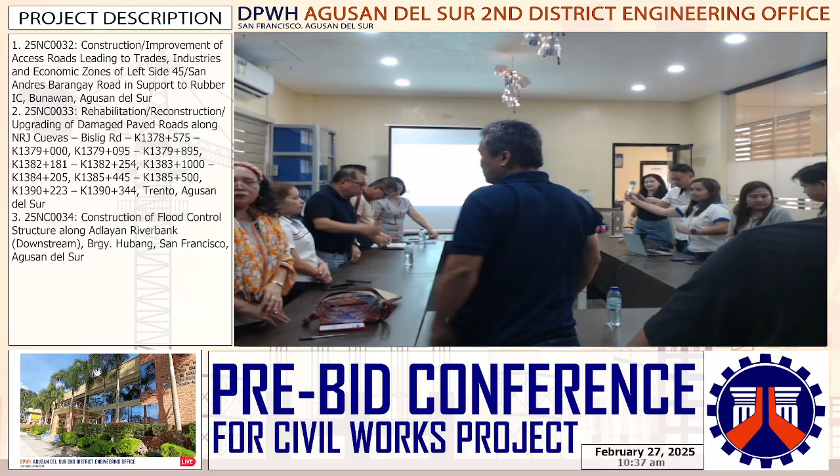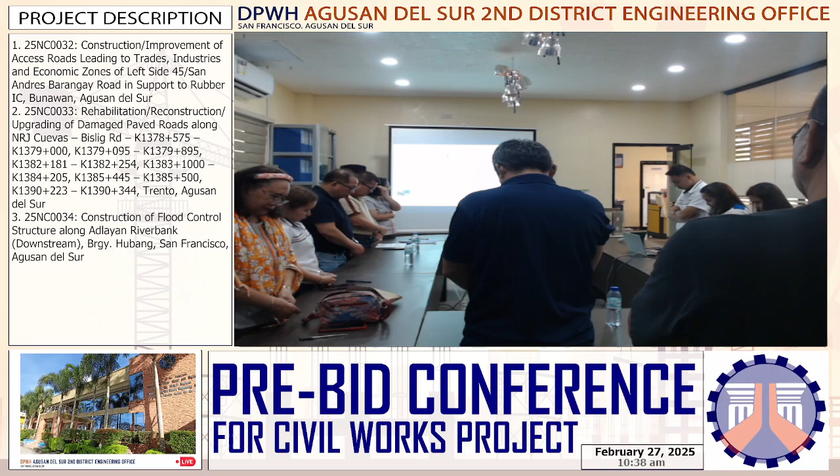Let us find ourselves in the presence of the Holy God, the Father, the Son, and the Spirit. Amen. Almighty God, we gather in your presence, seeking your guidance and wisdom as we embark on these new projects in 2025. We come to you with humble hearts, seeking your guidance and wisdom. Grant us clarity of vision and purpose, that we may align our goals with your divine plan. May our preparation and planning be infused with your spirit of excellence and integrity. Give us discernment and wisdom in our decision making, that we may choose the best path forward. Bless our teams in collaboration with unity, effective communication, and a shared commitment to excellence. As we navigate the complexities of the pre-bid conference, we ask for your protection and favor. May our endeavors be fruitful and successful, bringing benefit not only to our organization, but also to the communities we serve. We trust in your goodness and provision. This we ask in the mighty name of our holy God. Amen.

Okay, for attendance, Secretariat Protocol. Once again, good morning to each and everyone. Before we go to our pre-bid conference, I call the attendees of this activity's pre-bid conference.

For the BAC members, we have our Regional BAC Chairperson, Engineer Wilfred R. Bisaya. Our Regional BAC Vice Chairperson, Engineer Yodigario M. Maso. Regional BAC regular member, Engineer Manuel Sinario. Regional BAC regular member, Edwin Tina Corda, Ma'am Jovelinda Elanto, Engineer Elmelin Sipulancos, Engineer Rodel A. Ridao. For the Regional BAC Secretariat, yours truly, Engineer Delma Espresso, Engineer Alec Madeline C. Abogado.

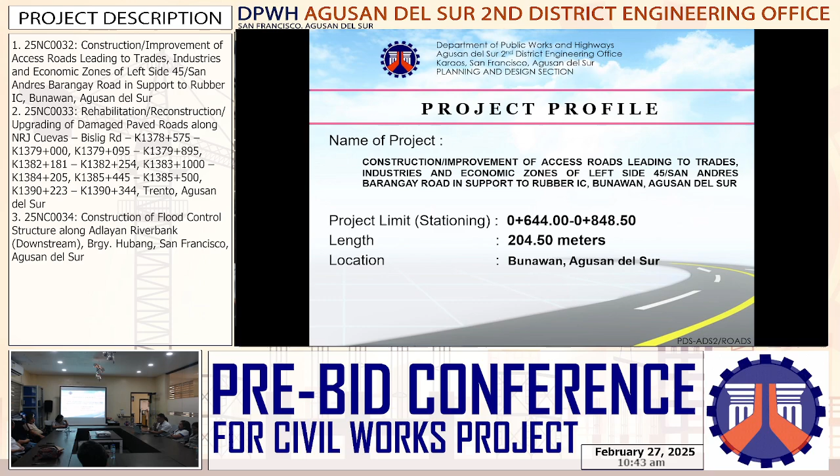The first project is the construction, improvement of access roads leading to trades, industries, and economic zones of Left Side 45, San Andres Barangay Road, in support to Rubber IC, Bunawan, Agusan del Sur, with a project limit of 0 plus 644 to 0 plus 848.5, with a total length of 204.5 meters. Location of project: Bunawan, Agusan del Sur. So it has an appropriation of 10 million pesos, ABC of 9.8 million, with a total calendar days of 94. Classification: roads. Source of fund: NEP, FY 2025.

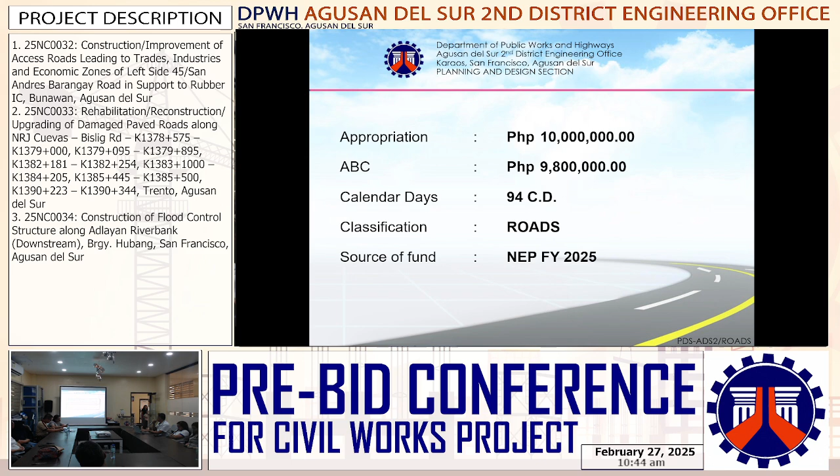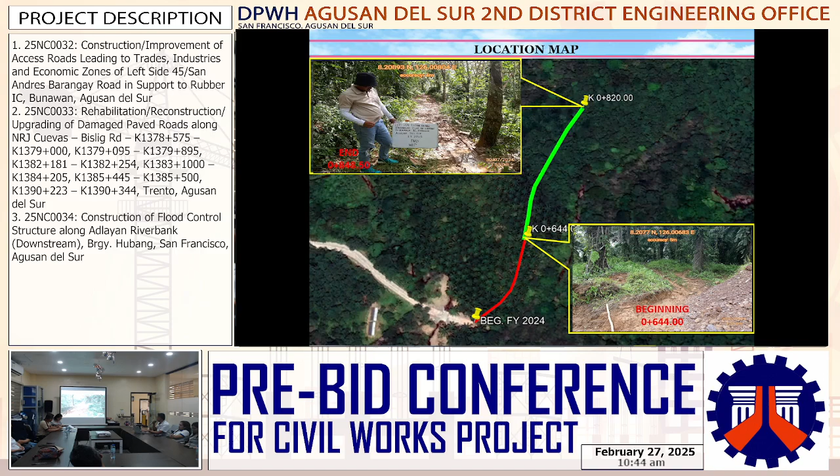So this is the listing of the NEP FY 2025. This is the location of the project, and the site photos. This is the plan and profile.

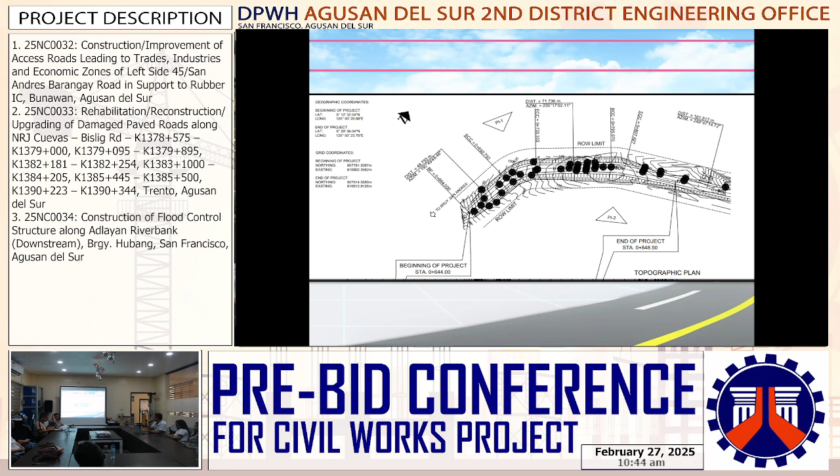For the typical section, we have a total width of the carriageway equivalent to 6.7 meters with 2 meter shoulders and a grouted riprap canal at both sides. So the thickness for our PCCP is 280 millimeters thick, and for the shouldering it is 150 millimeters thick. These are the cross sections.

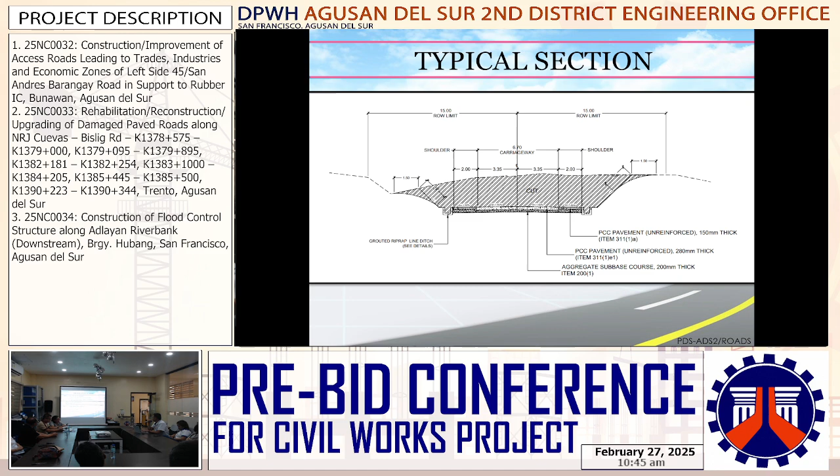For the program of works, for facilities for the engineer, we have provision of field office for the engineer on a rental basis, 2.5 months. Provision of furnitures, fixtures, equipment, and appliances for the field office, 1 lump sum. Under this item is the laptop computer for administrative use, 1 unit for the maintenance section.

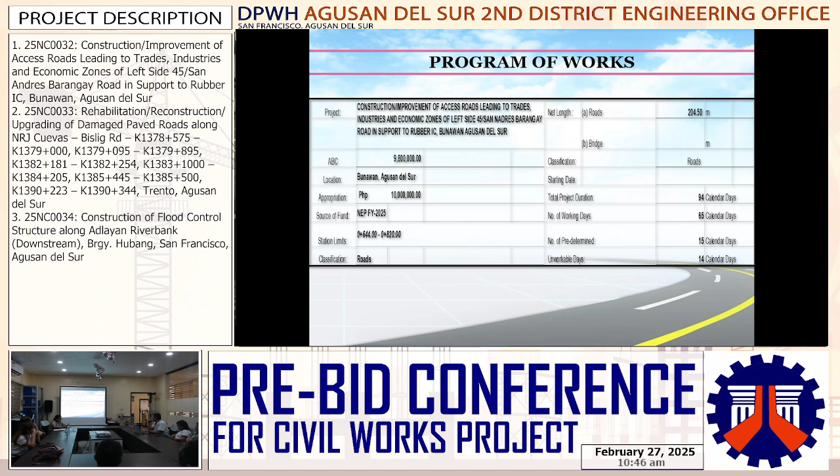For other general requirements, we have construction survey and staking, 0.18 kilometers. Miscellaneous survey and staking, 1 lump sum. Project billboard, signboard, 4 each. Occupational safety and health program, 1 lump sum. Traffic management and mobilization, demobilization, 1 lump sum each.

For the clearing and grubbing, 0.47 hectares. Surplus common excavation, 16,825.49 cubic meters. Embankment from roadway / structure excavation, 35.44 cubic meters. Subgrade preparation, 2,299.19 square meters.

For sub-base and base course, aggregate sub-base course, 409 cubic meters. For the surface course, we have Portland cement concrete pavement unreinforced, 0.15 meters thick, 409 square meters. Portland cement concrete pavement unreinforced, 0.28 meters thick, 1,483.88 square meters. For drainage and slope protection structures, grouted riprap class A, 86.91 cubic meters.

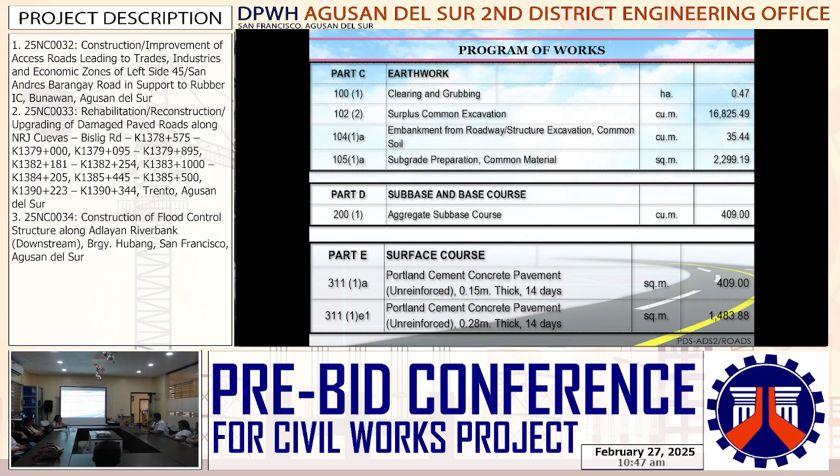Miscellaneous structures: hazard markers, 450 by 600 millimeters, Chevron signs, 6 each. Reflectorized thermoplastic pavement markings, white 51.25 square meters, and for the yellow 4.5 square meters.

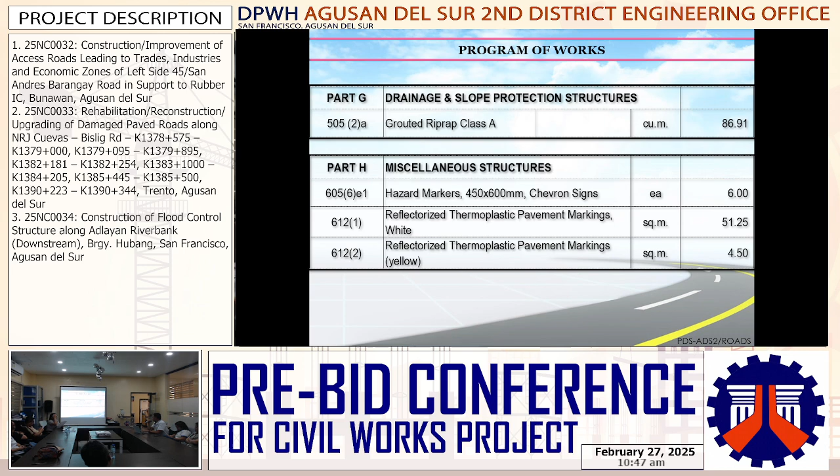For the quarry sources: for our item 200, will be taken at Salvacion, Bahayan River, Cuevas, Trento, Agusan del Sur with a hauling distance of 31 kilometers. For the sand, will be at Agusan River, Patrocenio, Sta. Josefa, Agusan del Sur with a hauling distance of 33 kilometers. For our gravel and boulders, will be at San Ignacio, Santa Maria, Trento, Agusan del Sur with a hauling distance of 37 kilometers.

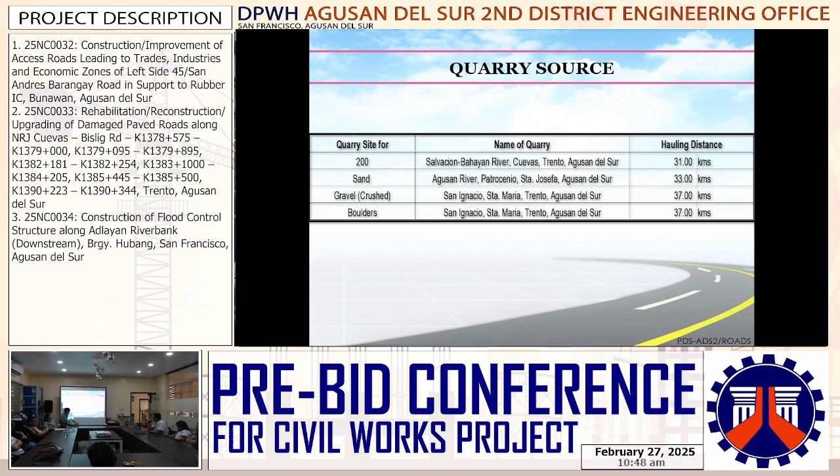For the minimum equipment requirement, we have dump truck 2 units, concrete vibrator 2 units, transit mixer 2 units, vibratory roller 1, cargo truck 1, set applicator machine 1, bulldozer 1, water truck 1, concrete saw, concrete screeder, concrete mixer, payloader, road grader, backhoe, kneading machine, bar bender, bar cutter, total station, joint sealer machine, 1 unit each.

And that's all for this project.

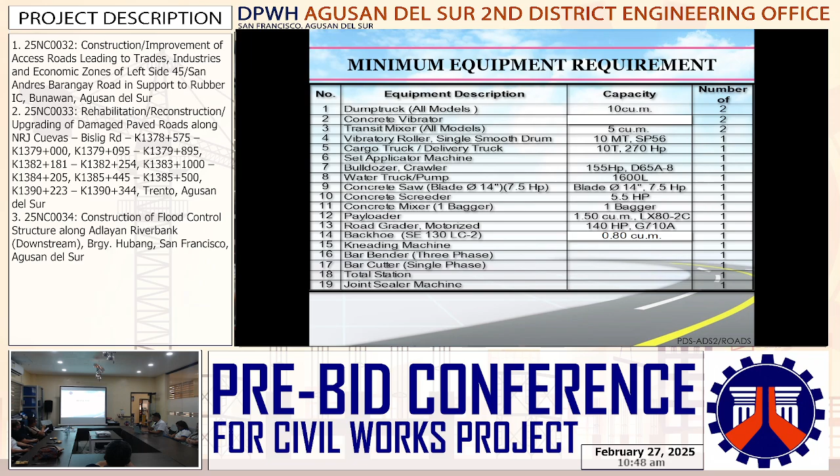Okay. Any question for the presentation? Comments? Say yes, sir.

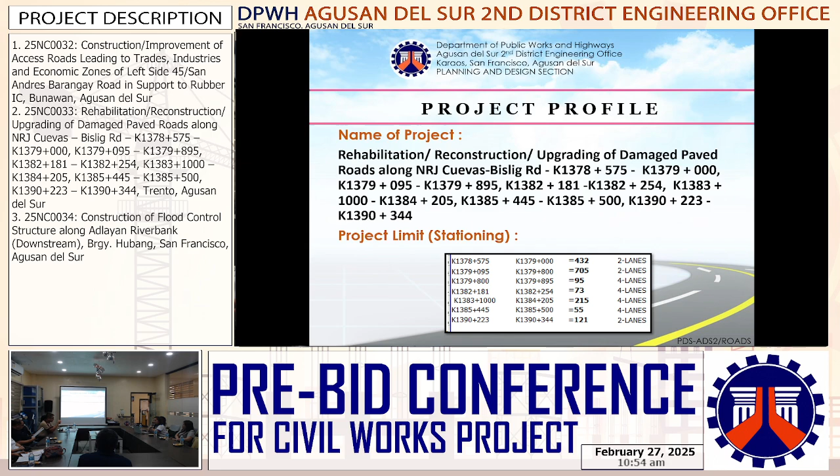By the way, the project is listed in GAA 2025 but under the DPWH initiative, so we are waiting for the release of the SAA.

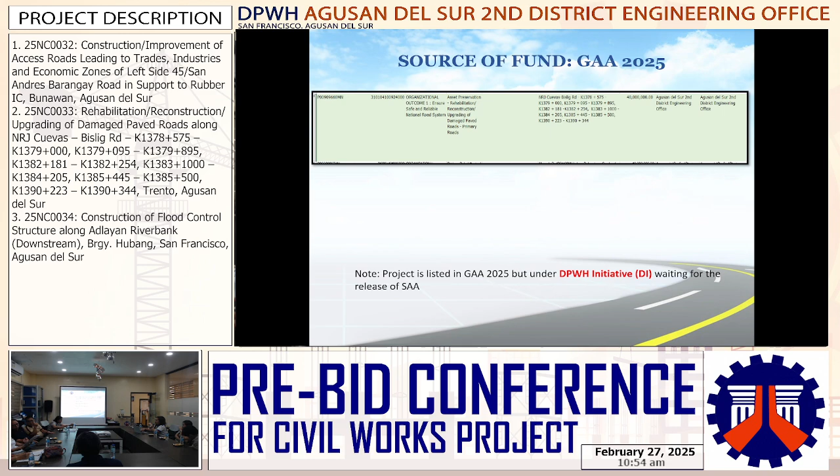Type 4, reconstruction of concrete pavement with a total or net length of 1.696 kilometers or 3.392 lane km, as per PAO and as reflected in GAA 2025 details. Located at Trento, Agusan del Sur, with an appropriation of 40 million, an ABC of 39.2 million, calendar days to complete 215, classification: reconstruction of concrete road, source of fund GAA 2025.

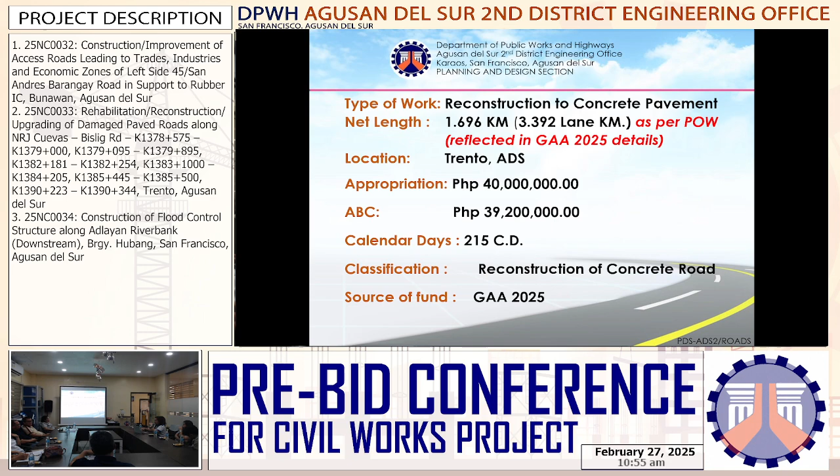For project description, this project involves reconstruction of concrete pavement at stations specified or flashed on the screen, with a target length of 1696 meters or 3.392 lane km.

Carriageway with inner lanes, lane 2 and lane 3, of 6.7 and 6.1 meters, thickness of 0.28 or 280mm and 230mm. Then we have provision of CTB with 0.2 meters or 200mm thickness in order to improve the subgrade of the road.

Removal of the existing PCCP bad section with a carriageway width of 6.1 and 6.7 meters respectively. So this is the photo of the before stage.

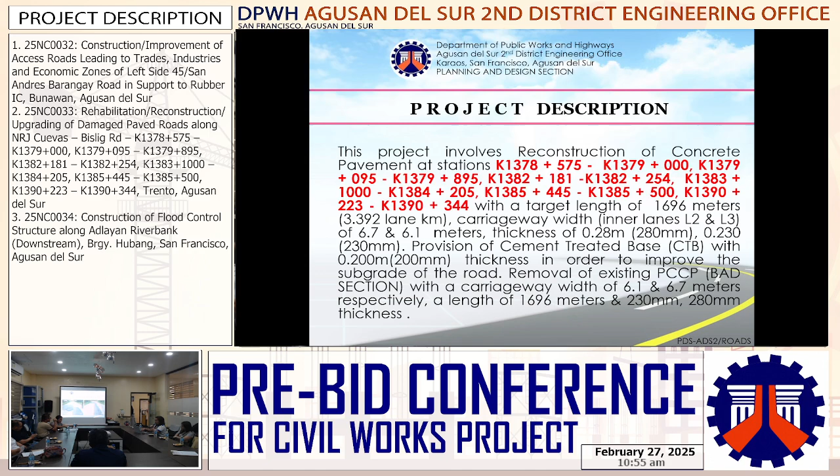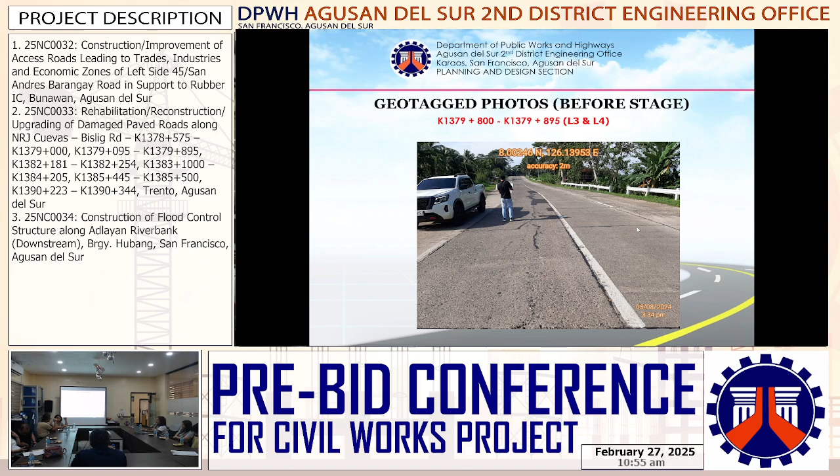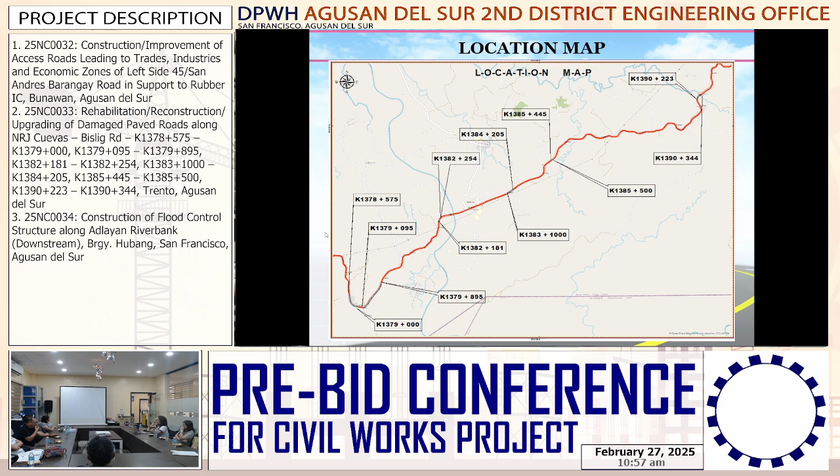For the program of works, we have Part A, facilities for the engineer. We have construction of field office for the engineer, 5x5 or 25 square meters, one lump sum. A.1.1.11, provision of furniture, fixtures, equipment, and appliances for the field office for the engineer.

We have the UPS for desktop computer, specialized software. We have one unit for planning, one lump sum.

Part B, we have other general requirements. B.4, construction survey and staking, 1.7 kilometers. B.4.10, miscellaneous survey and staking, one lump sum. B.5, project billboard or signboard, 4 each. B.7.2, occupational safety and health program, one lump sum. B.8.2, traffic management, one lump sum. B.9, mobilization, demobilization, one lump sum.

So we have Part C, for the earthwork, we have 1013(A6), removal of actual structures and obstructions, 0.3 thickness PCCP reinforced, near the approach slab at Bitaogan Bridge. We have 40 square meters.

We have also removal of actual structures, obstructions of 0.23m thickness and reinforced, 5,002 square meters. We have also removal of actual structure obstructions of 0.28 meters thick and reinforced, 5,835.7 square meters. So we have 1022, surplus common excavation, 2,313.72 cubic meters.

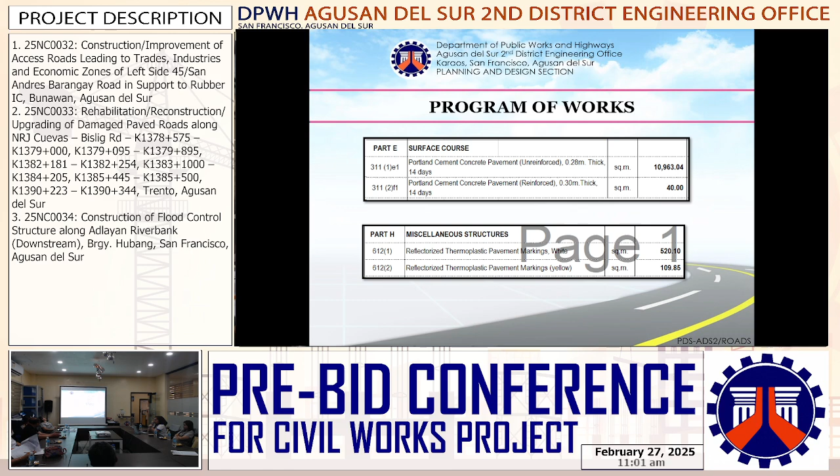For the minimum equipment requirements: dump truck 2, payloader, backhoe with breaker, road grader motorized, vibratory roller, water truck, total station, 1 each. Transit mixer 2, concrete vibrator 2, concrete screeder, concrete saw, bar cutter, bulldozer, cargo truck, set applicator machine, kneading machine, water pump, joint sealer machine, 1 each.

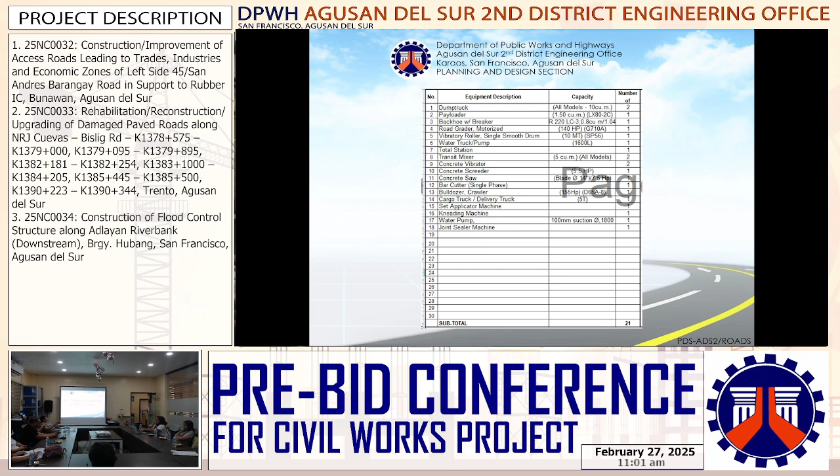For the quarry sources: item 201 will be taken at Salvacion Bahayan River, Trento, Agusan del Sur, with a hauling distance of 8 kilometers. Sand and gravel will be taken at San Ignacio Simolo River, Trento, Agusan del Sur, with a hauling distance of 7 kilometers. The sand must be screened and washed, and the gravel is crushed.

That's all for contract ID.

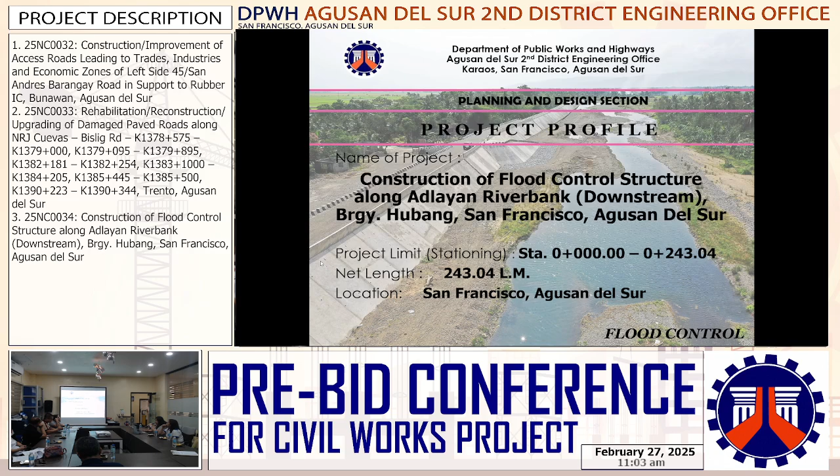Calendar days to complete is 210 days. Classification is under flood control, and the source of fund is under GAA FY 2025 under the category of CI, continuing implementation.

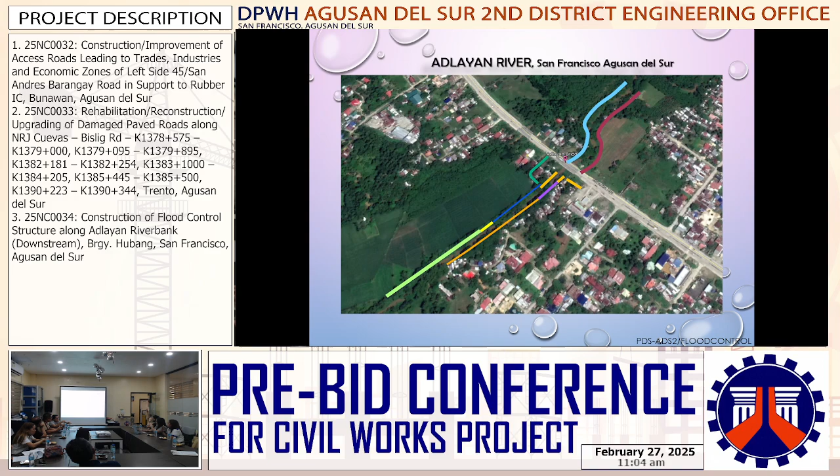This is the progress of the Adlayan Riverbank protection as of 2025, and this green part is the proposed project. This is the progress report that I've already presented before.

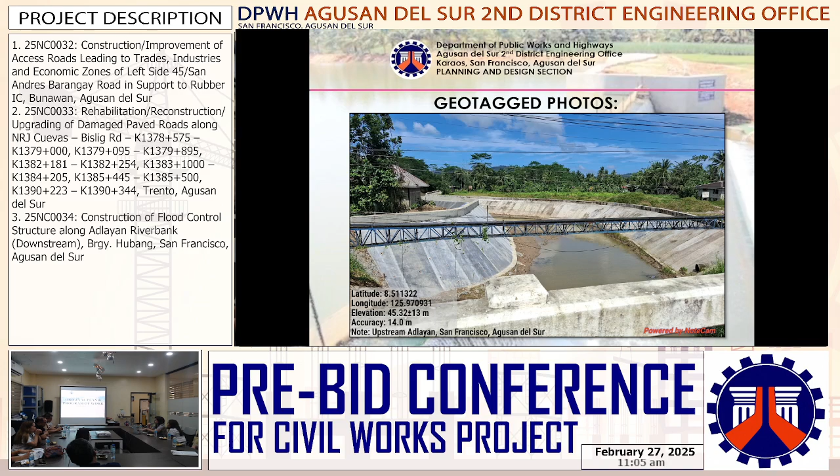And the photos there at the beginning and the end, and our topographic map.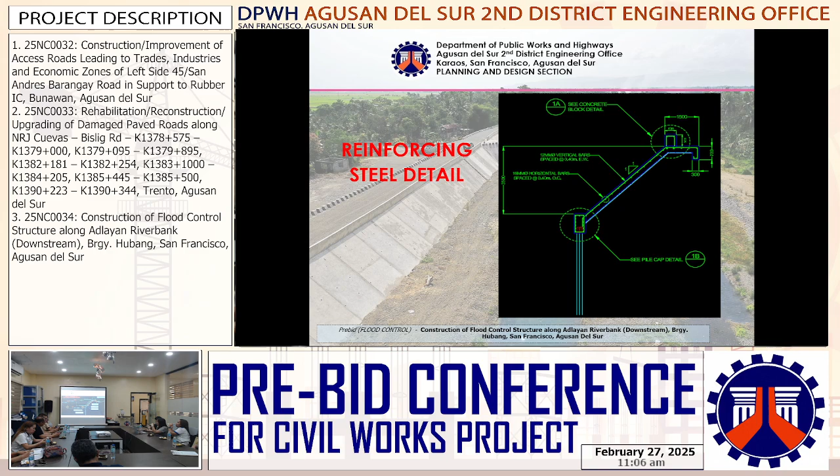For the typical reinforced concrete slope protection, we have concrete slope protection of 0.3 meter thick, and underneath is lean concrete of 50 mm thick. Our berm is 1.5 meter with concrete blocks of 0.5 by 0.6. Our structure slope has a sloping of 1:1 and vertical height of 3.5.

Pile cap is 0.5 by 1 meter depth with structural steel sheet pile of U-type, 9 meters in length. For the land side, we have grouted riprap slope protection of 0.3 m thick and aggregate sub-base course of 200 mm thick, 2 meter width.

For the reinforcing steel detail, we have 12 mm vertical bar spaced at 0.4 each way, and 16 mm horizontal bar spaced at 0.4 on center.

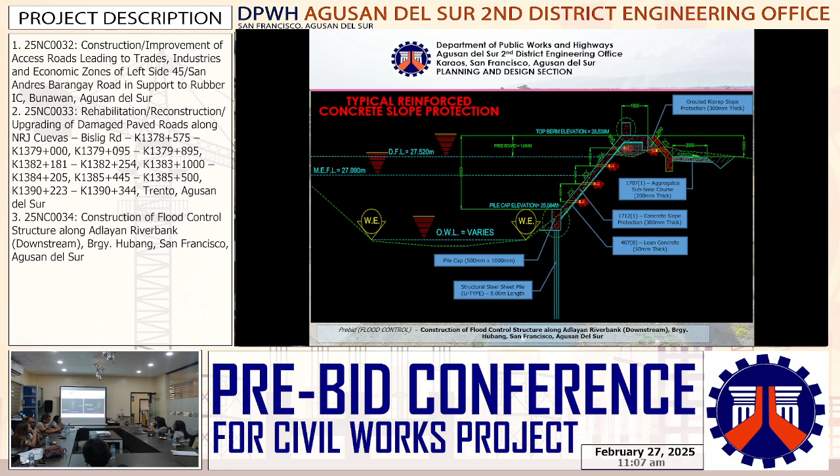For the concrete block, we have 12 mm stirrups spaced at 0.4, and two pieces of 12 mm reinforcing steel horizontal bars. For the pile cap, we have 12 mm stirrups spaced at 0.4 each way, and 13 pieces of 16 mm reinforcing steel horizontal bars.

Our steel sheet pile is 9 meters, type GSP type 2, with the specification indicated on the screen.

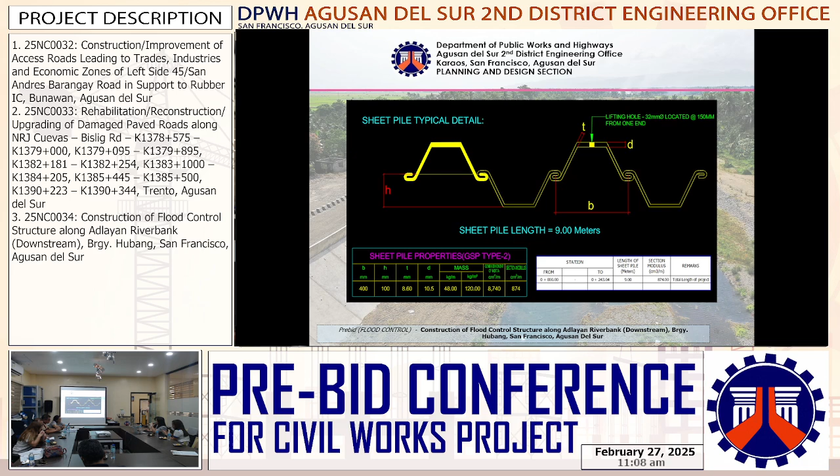With the programs of work, items involved are the following. For Part A, facilities for the engineer, we have A.1.13, construction of field office for the engineer, 1 lump sum. A.1.111, provision of furnitures, fixtures, equipment, and appliances for the field office for the engineer.

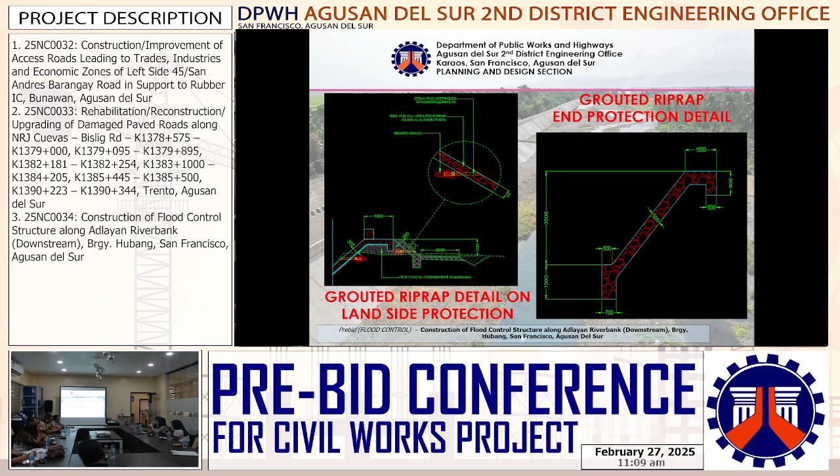For Part B, other general requirements, we have B.41, construction surveillance staking, 0.243 km, project billboard signboard for each, occupational safety and health program, 1 lump sum, traffic management, 1 lump sum, mobilization, demobilization, 1 lump sum.

For Part LA, earthworks, we have clearing and grubbing with 3,050.54 square meter quantity. Individual removal of trees, 19 each. Structure excavation, common soil, 1,641.84 cubic meters. Embankment from borrow, 978.97 cubic meters. Aggregate subbase course, 104.99 cubic meters.

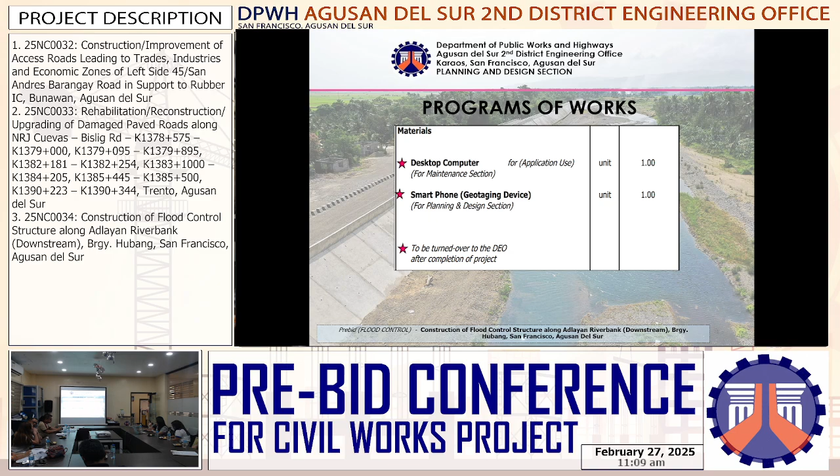For Part LB, bank and slope protection works, we have reinforcing steel, grade 40, for pile cap and concrete blocks only, with 8,413.42 kilograms. Structural concrete class A for pile cap and concrete blocks, 193.83 cubic meters. Lean concrete class B, 75.46 cubic meters. Grouted riprap class A, 227.10 cubic meters. Concrete slope protection, 502.10 cubic meters.

Structural steel sheet piles furnished, 5,463 meters. And structural steel sheet piles driven, 5,280.9 meters.

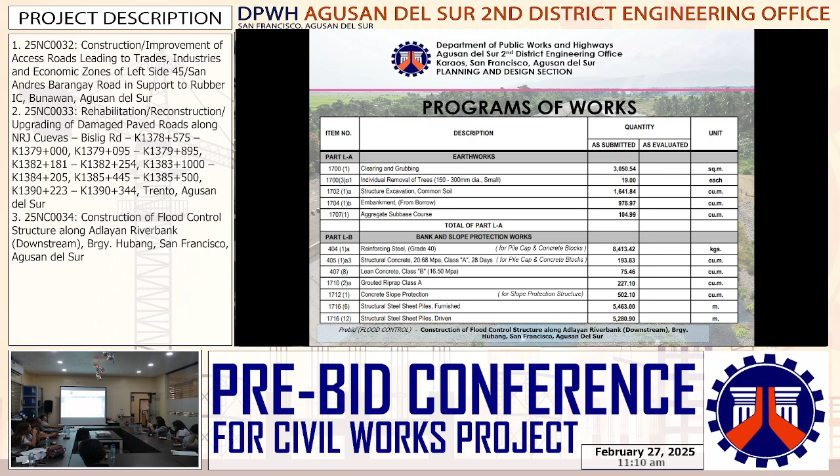For the minimum equipment required, we have bulldozer 1, backhoe 1, payloader 1, dump truck 2, motorized road grader 1, vibratory roller, water truck 1, bagger mixer, concrete vibrator, plate compactor, generator set, truck mounted crane, vibro hammer, transit mixer, welding machine, and cargo or service truck, 1 unit each.

For the quarry sites, embankment and aggregate subbase course will be taken from Lapinigan Creek, Barangay Ormaca, San Francisco, Agusan del Sur, with hauling distance from site of 14 kilometers. Sand will be from Agusan River, Barangay Patrocinio, Santa Josefa, Agusan del Sur, with 71 kilometer hauling distance. Gravel will be from Simula River, San Ignacio, Santa Maria, Trento, Agusan del Sur, with 76 kilometer distance. And the boulders will be taken from Maog River, Barangay New Maog, Prosperidad, with 20 kilometer hauling distance.

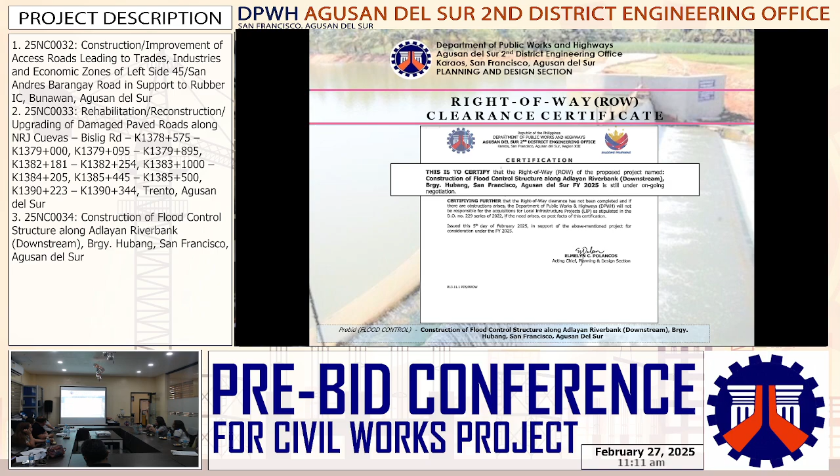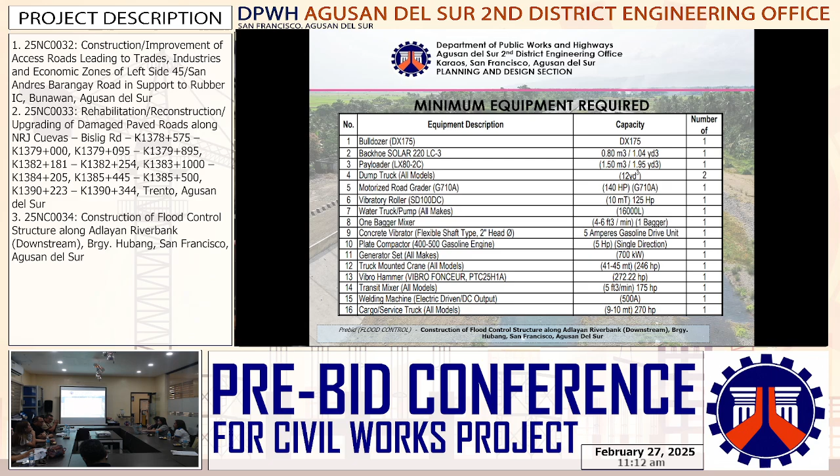Morning once again for the bidding documents.

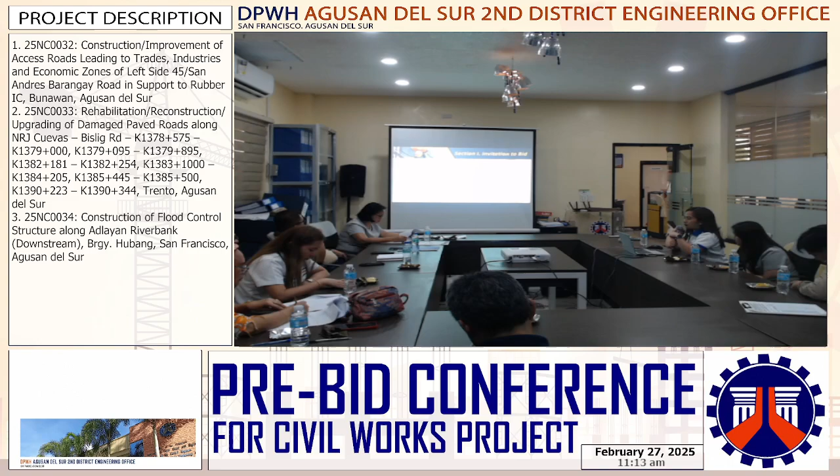Invitation to bid. The Department of Public Works and Highways, Agusan del Sur, 2nd DEO, Carao, San Francisco, Agusan del Sur, through FY 2025 General Appropriations Act (GAA), intends to apply the sum of 95,530,000 pesos only, being the total approved budget for the contract (ABC), to payments under the following contract projects. For contract ID 25NC0032, contract name: construction improvement of access roads leading to trades, industries and economic zones of left side 45, San Andres Barangay Road in support to rubber IC located at Bunawan, Agusan del Sur, with an ABC of 9.8 million.

Scope of works: construction of concrete road. Calendar days to complete: 109. Bid documents fee of 10,000.

For contract ID 25NC0033, contract name: rehabilitation, reconstruction, upgrading of damaged paved roads along NRJ Cuevas Bislig Road, stations 1378+575 to 1379+000, 1379+095 to 1379+895, 1382+181 to 1382+254, 1383+1000 to 1384+205, 1385+445 to 1385+500, 1390+223 to 1390+344, Trento, Agusan del Sur, with an ABC of 39.2 million.

Scope of works: reconstruction of concrete pavement. Calendar days to complete: 215. Bid documents fee of 25,000.

For contract ID 25NC0034, with contract name: construction of flood control structure along Adlayan River Bank, downstream, Barangay Hubang, San Francisco, Agusan del Sur, with an ABC of 46,530,000. Scope of works: construction of flood mitigation structures.

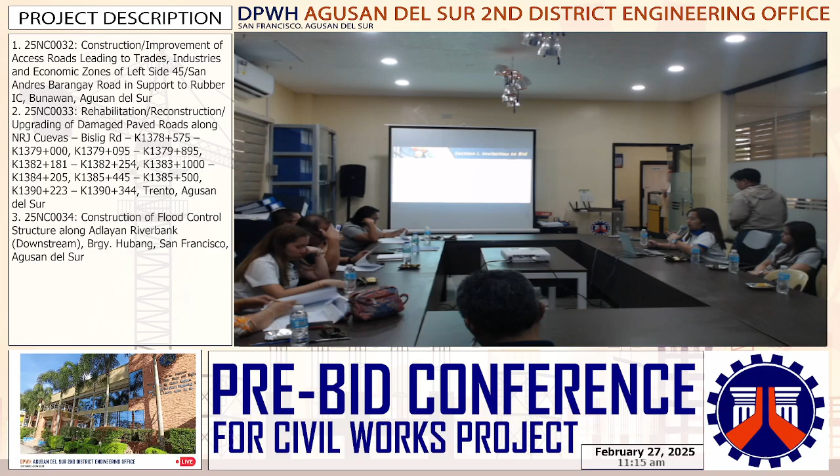Calendar days to complete: 210. Bid documents fee of 25,000. Bids received in excess of the ABC shall be automatically rejected at bid opening.

Prospective bidders should be registered with and classified by the Philippine Contractors Accreditation Board (PCAB), with PCAB license size range of at least Small B for contract ID 25NC0032, and Medium A for contract IDs 25NC0033 and 25NC0034.

A complete set of bidding documents may be acquired by interested bidders from the address below or may be downloaded free of charge from the website of the Philippine Government Electronic Procurement System, the PhilGEPS, and the website of the procuring entity starting on February 19, 2025, and upon payment of the applicable fee for the bidding documents pursuant to the latest guidance issued by the GPPB.

In the amount above stated, the procuring entity shall allow the bidder to present its proof of payment for the fees in person, by facsimile, or through electronic means.

The DPWH will hold a pre-bid conference today, February 27, 2025, at exactly 10 a.m. at the Procurement Conference Room, DPWH Agusan del Sur, 2nd DEO, Carao, San Francisco, Agusan del Sur, and through Zoom meeting, ID flashed on the screen. Bid submission may be done manually or electronically online.

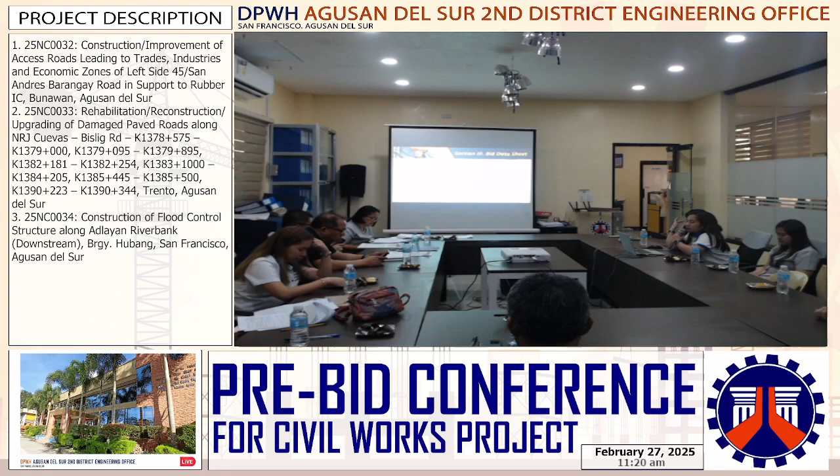For contract ID 25NC0034, the required PCAB license: size range medium A, license category B, largest single project 23,265,000 or 50% of the ABC, allowable range of contract cost up to 30 million. For the key personnel, the relevant and general experience must be 5 years for PM, PE, ME, foreman, and construction safety and health officer.

For contract ID 25NC0032, the bid security shall be in the form of a bid securing declaration or any of the following forms and amounts: A, the amount of not less than 196,000 or 2% of the ABC if bid security is in cash or in check; B, the amount of not less than 490,000 or 5% of the ABC if bid security is in surety bond.

For contract ID 25NC0033, the bid security: the amount of not less than 784,000 or 2% of the ABC if bid security is in cash or in check. B, the amount of not less than 1,960,000 or 5% of the ABC if bid security is in surety bond.